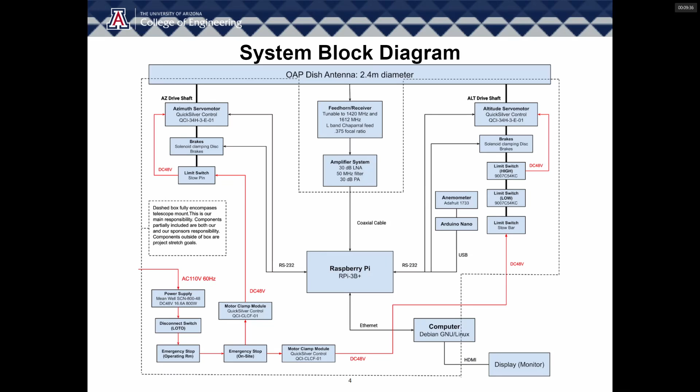Yeah. Great question. So continuing, this is our system block diagram. The dashed lines include the system that we're working on, so that's our scope. So that doesn't include the amplifier system or the receiver, but it does include the Raspberry Pi, servo motors, brakes, and limit switches, which we're all fixing, and includes the brakes and power supplies. And of course the dish antenna, which is currently 2.4 meters. We'll talk more about this in the presentation.

So these are our system requirements that Justin laid out for us and we wrote up. Our performance requirements include the resolution, pointing accuracy, and gravity sag. Our environmental requirements include the operational wind speed, survival wind speed, our ingress protection standard, the panel separation, the gaps in between each panel, lightning rods, which we're expecting to put onto our telescope, and stow pin, to ensure that there isn't a flying radio telescope on the roof of the building.

We also include our safety requirements, which include the hazards lockbox, and we have an emergency switch. Our electrical requirements include the GUI, the limit switches on the mount, and the power consumption the telescope uses, and the optical requirements. That includes the wavelength that we are intending to observe, the aperture, illumination angle, offset angle, and the mounting location. And our mechanical requirements include the weight and the brakes. And we'll go more into detail about this. I'm just going over what our system requirements include.

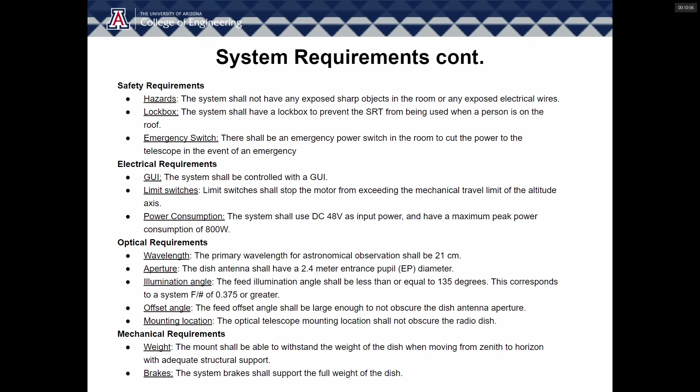Sorry, Bridget, to interrupt. You skipped over stow pin on the prior slide. Yes, so I'll explain more. It's a stow pin that basically prevents the dish from spinning around erratically. So we'll explain more what that looks like as we go into the presentation. Mason will talk about that.

Design details, Carrie will start talking about. Okay, so on the next slide, it's a repeat of the picture we showed you previously. So this is a satellite view of the potential placement of the telescope. Option 1 is preferred because its view is less obstructed than option 2. We're currently in the process of determining which option or alternative would work.

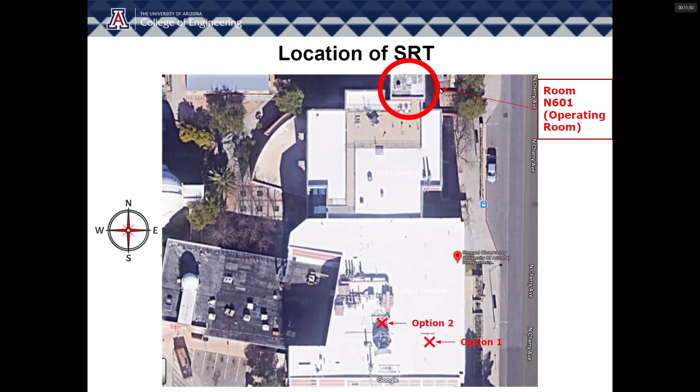On the next slide, we show the size and weight of the telescope. So it's almost 500 kilograms with the max height being just over 15 feet at stow position. And our stow position is 30 degrees past zenith. And its max breadth is a little over 12 feet, which is its hazard zone at horizon.

So this is also why we prefer option 1, because its dimensions are slightly bigger. So the pad more inclusively shows the hazard zone than the 8 by 8.5 dimension for option 2.

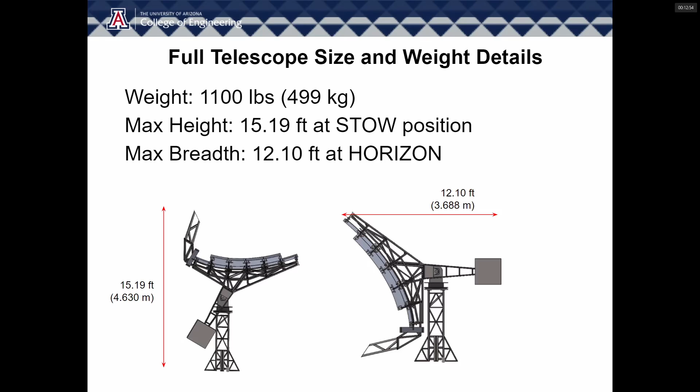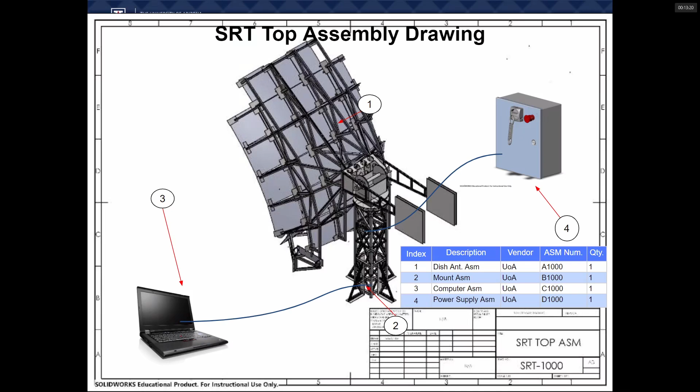All right, so here's our top assembly drawing. We've broken it up into 4 separate subassemblies. So first is our dish antenna assembly. This includes the trusses and the paneling that Justin Slive is going to be making. Number 2 is our mount subassembly. This is just, as we've stated before, the mount that's currently sitting in the storage room. Number 3 is our computer assembly, and number 4 is our power supply assembly.

All right, so here we're going to break down a little bit more about what our dish antenna assembly is. So the dish antenna assembly is primarily 4 vertical struts. If you look at the top assembly on the left-hand side, 1, 2, 3, and 4, those are the main vertical struts, and those will be connected together by horizontal angle irons. Additionally, each of these will be connected to the mounting plate.

Additionally, we will have 2 receiver arms, 5 and 6 on the bottom. And those are actually detachable, and those are just going to be where the receiver is going to be placed when it's eventually made.

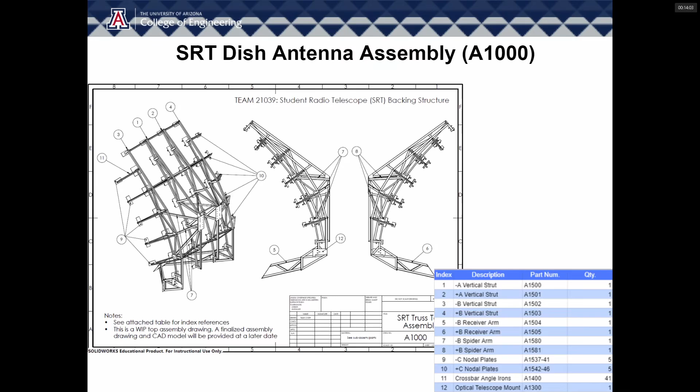So this is our SRT mount assembly. The first part is the mount central structure. The second part is the mount legs. The third part is the mount alt-az structure. The fourth is the mounting plate. The fifth is the servo motor. 6 and 7 are the gear reducers, and 8 is the anemometer. I just want to mention that the only thing we changed in this assembly was the counterweights, since this is designed for a new and heavier dish.

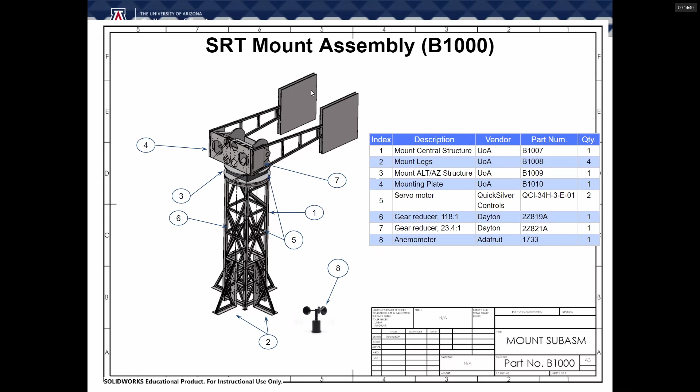So in terms of the operation of our telescope, I think the slides are a little backwards. When we're operating the telescope, the stow pins are going to be removed, but anytime the telescope is not in operation, which is going to be a majority of the time it's sitting up on the roof, these stow pins are going to be in the telescope to be an extra fail-safe should brake failure occur or unexpected apocalyptic hurricanes hit Tucson.

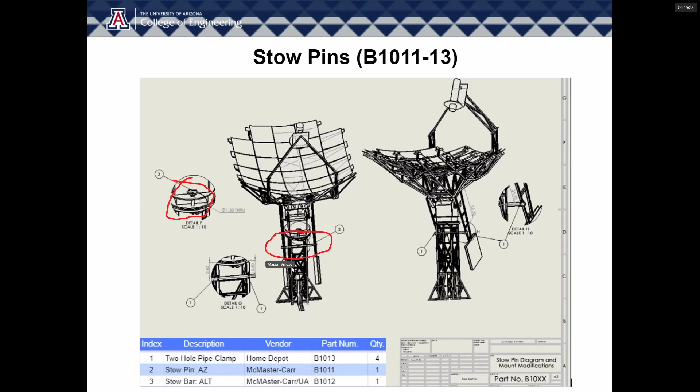So what we have is a stow pin on the az structure, and as you can see on the diagram over to the left, this stow pin goes straight through the central structure, which will stop it from rotating around. And then we also have a stow bar that connects the counterweight arms to the actual mount structure itself at stow position. And this will limit the altitude motion. By having both of these stow pins in, it'll be a good extra fail-safe.

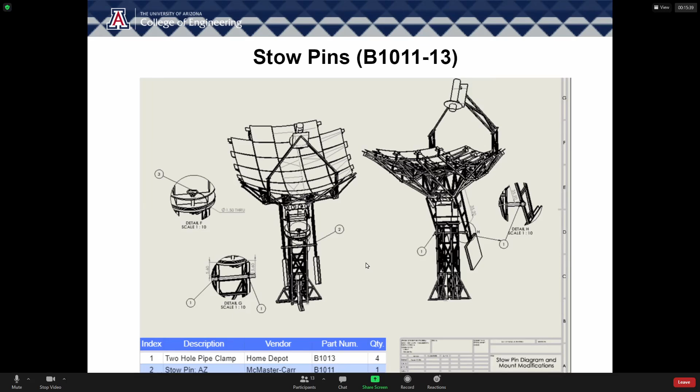So once again, going to the operation plan. Whenever someone has to approach the telescope, it will have to be completely de-energized, and we're using a lockout tagout procedure to ensure safe practices and that no one can turn on the telescope and make it spin around while someone's out there trying to remove or put in the stow pins. So once the lockout tagout key is activated, the operator can go out onto the roof and remove the stow pins and bars whenever they need to operate it.

And then when the telescope is stowed and powered off, which like I mentioned is going to be the vast majority of the time that this telescope is sitting on the roof, the stow pins are going to be on it, and the operator must schedule a specific time to be approved in order to use the telescope. As I've mentioned, the stow pins are a manual thing. We need to have approval, lockout, tagout. So there's not really going to be much chance of this telescope spinning around wildly without someone being fully aware of what's going on.

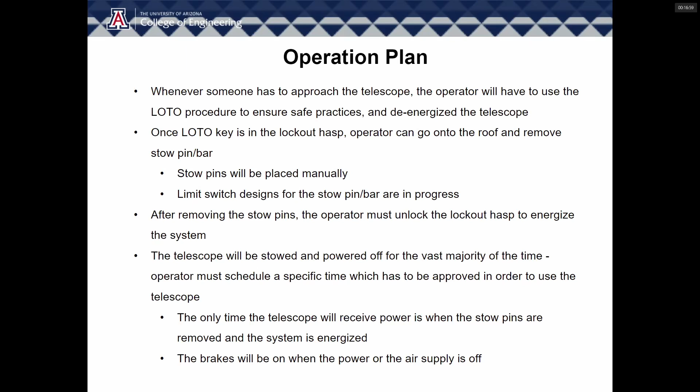I should also mention one other thing: if the power goes out, the brakes are clamped at no power. So when the telescope is powered down, the brakes are fully clamped on it in addition to the stow pins.

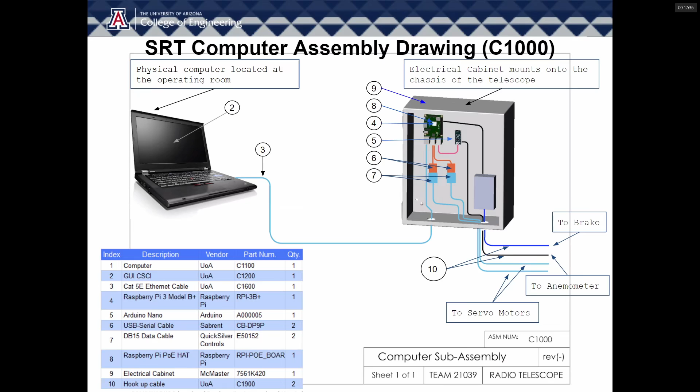Okay, so here is the drawing for our computer subassembly. The mount will be controlled remotely from room N601 using the GUI on the computer. The electrical cabinet displayed is NEMA 4 rated, and it will hold the Raspberry Pi, the Arduino Nano, and the brake controls. And then the Raspberry Pi will connect back to the computer, which will allow for precise control and monitoring of the telescope. Please note that this is the same electrical box that is shown on the next slide, but we separated the drawing so we could show you in more clarity the separate sub-assemblies. So Shangri will go into the electrical, the power supply.

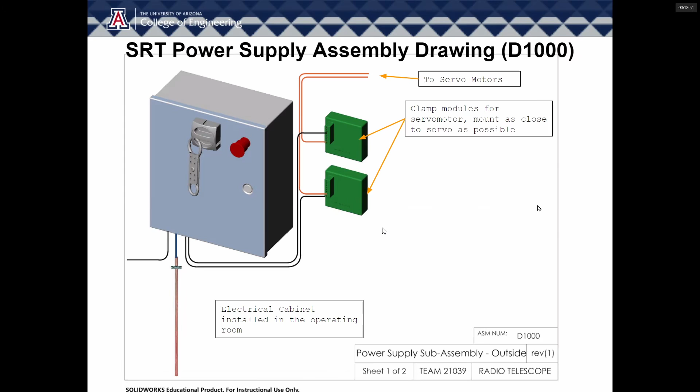Whenever you want to perform maintenance, say remove the stow pin, place the stow bar, it needs to be lockout tagout. When this lockout tagout is activated, the telescope will be de-energized completely. Nothing is going to move. We also have an e-stop on there in case somebody is around and they want to shut the telescope off. And we have the 2 green modules. They are really mounted on the telescope chassis. We just showed it for the purpose of showing. They are responsible for dissipating the back EMF when the servo motor is decelerating.

Ingrid, can I just point out one thing? The lockout tagout will be always engaged unless someone is actively using the telescope. So there will always be a padlock there. Yeah, and when the padlock is there, the telescope will be completely de-energized.

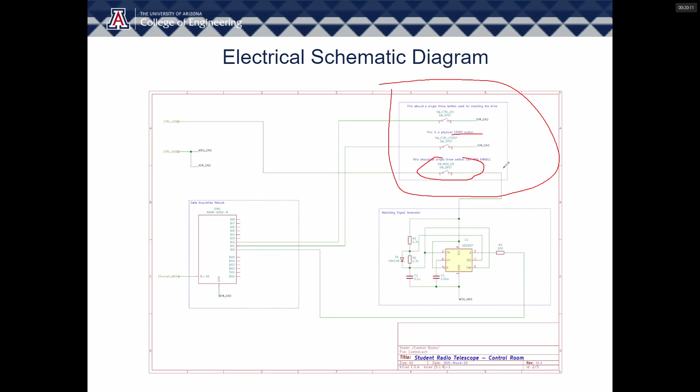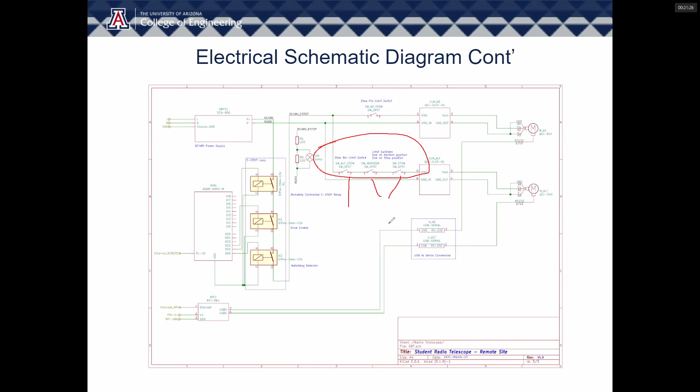And the same thing goes on for the altitude. The first one is the altitude stow bar limit switch. If the stow bar is left in, you cannot turn on the telescope. The second and the third one are limit switches. They just limit the physical travel of the antenna dish so it doesn't crash to the floor or go too far out of the mechanical travel of the telescope.

How do you limit the azimuth travel? So far, the azimuth limit is done by the software. In the software, we just say if the telescope has been turned 360 degrees, then it exceeds the limit. The main constraint is cable twisting, because we are cable feeding through the center of the telescope. That's the main constraint. But altitude, that would be a physical limit switch.

Yeah, I think you're going to find you want an azimuth limit switch as well, because you'll twist your cables off at some point if you don't, especially if you have untrained people using it. We have a solution. We don't have a physical limit switch, but we have a software limit switch. The physical switch for the azimuth, that's for the stow pin. If the stow pin is left in, then you cannot turn it on.

You also have a limit switch for travel limits on the elevation. Yes. Elevation has a physical limit switch. If it goes out, it cuts the power.

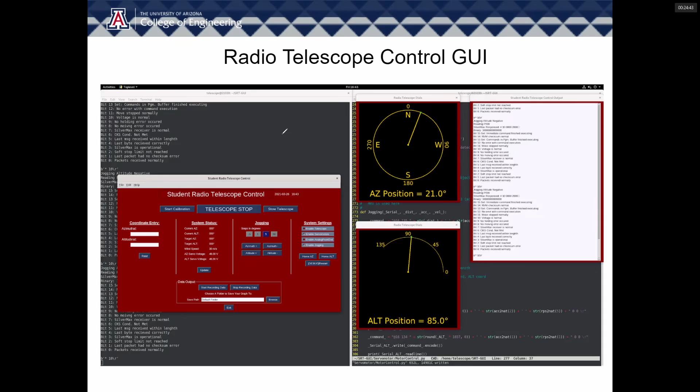And on the next slide, we have the stow. This is also a very important safety feature. This is because our telescope is an off-axis design, which means when the telescope is pointing at the zenith, that is not actually the place where the cross area is minimized. It's actually a little bit past the zenith. So when you want to shut off the telescope, you have to turn it to the stow position. In our case, that will be 30 degrees past the zenith to minimize the cross area, so the wind load is minimized.

The software is also recording the absolute position of the servo motor and its motion velocity every 2 seconds. That way, if the telescope experiences a power loss, we still know its last position, and when the power comes back on, we have a way to recover it using the stow telescope and the jogging buttons to get it dialed back in.

So here we have a short video showing just the jogging feature of the GUI. As Changri mentioned, first you must enable the servo motors and enable jogging. From there you can jog in degree increments from 0.5 degrees to 10 degrees. An operator can jog the mount in both directions at the same time. Here we can see we're moving both in the alt and the az direction.

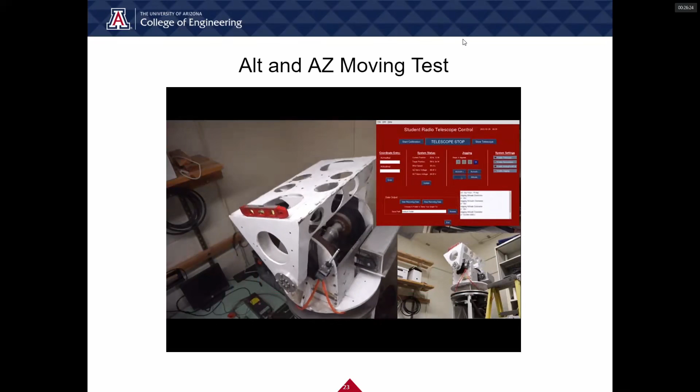Not shown in this video is the coordinate entry feature, which Changri mentioned before. That allows the user to input specific alt-az coordinates, and the axes will move to the inputted coordinates correctly.

Can I ask, that's a nice video. What speed does that represent? I believe we currently have the velocity as 2 RPM. It's easily changeable for however fast or slow we need it. We know that generally it might want to go a little bit slower, but that is something that's easily changed in the software as needed.

Yes. For testing, sometimes we will change the velocity and acceleration. And also, this video is a little bit sped up, so the actual thing is going to be slower than the one in the video. Thank you. Yeah, I think that was my question, is the video speed. The presented video is actually sped up.

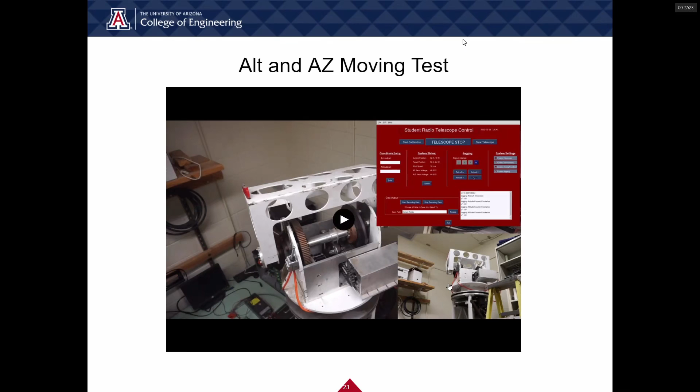Very good. Okay. And in your requirements, did you have a maximum velocity rate or acceleration rate that you guys want to move this dish at? We don't have that in our requirements, no. Okay. Slow and steady. All right, so you're not tracking LEOs. That's not the plan. Okay. I think we might want to track the sun or the moon or something like that. I think that's the best we might get. Good ephemeris objects, right?

Okay, so moving on to our safety considerations. We have an emergency stop on the electrical cabinet at the telescope. We have an emergency stop in the operating room, which is the same design as the Bio-2 radio telescope, as previously mentioned. There's a software emergency stop on the GUI. There's a disconnect switch with lockout hasp connected for lockout tagout protocol. If the disconnect switch is disconnected, the entire system is de-energized.

Our factor of safety was at least 5 for all structural requirements under survival wind speed conditions. Our assembly will be on the 5th floor roof, which follows and is set up for all safety protocols. All components can easily be moved from the base floor of Steward Observatory to the roof. Our sponsor plans on painting a hazard zone circle around the telescope to prevent people from entering.

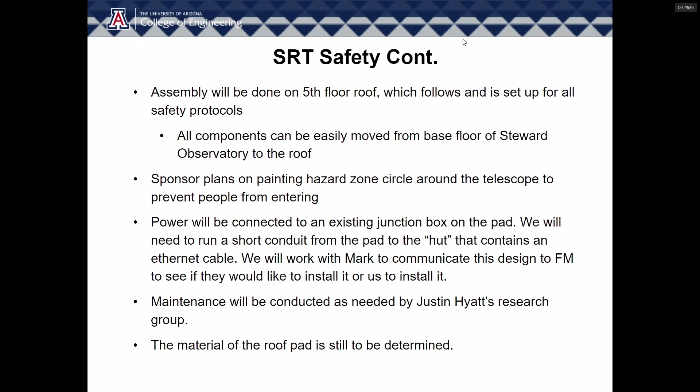For survival wind speed, we have to have... I've got a quick question, Mason. Sorry. Did you include a safety factor in the operational pointing by chance? Well, that's not really... Yeah, we have the stress plots, but we were just looking at strain because the mount's under more force under survival and it was fine there. Okay, cool. I was hoping we might get a little bit extra because we don't need a safety factor for the operational. Anyway, carry on. Like extra wind speed?

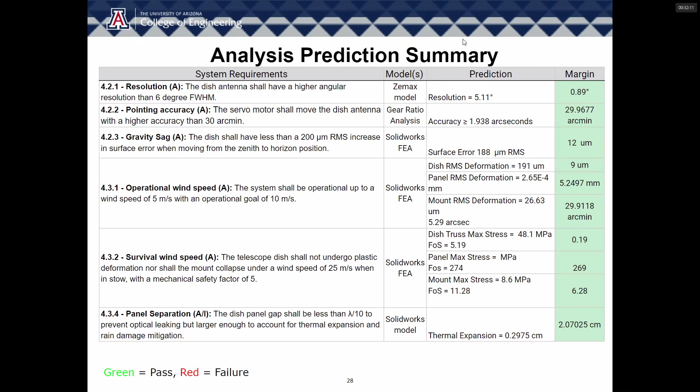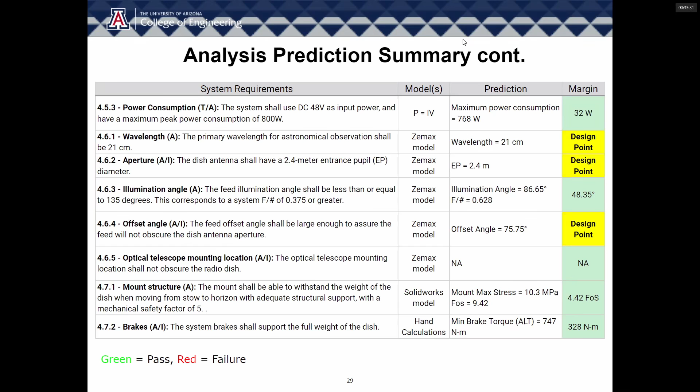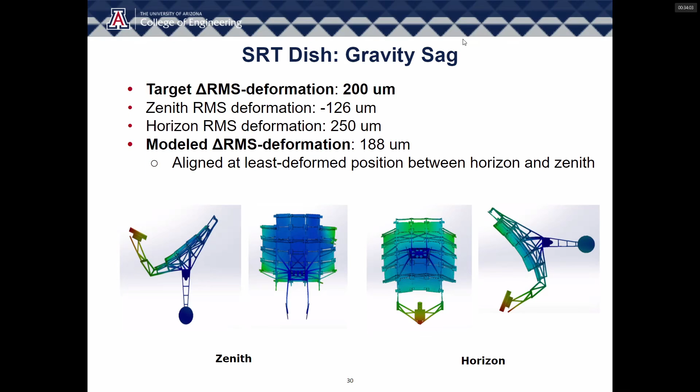All right, so one of our performance requirements is gravity sag. So for this system, we're looking for a target delta RMS deformation of 200 microns or less. Through simulation, we found that at the zenith, the RMS deformation was 126 microns, and at horizon, the RMS deformation was 250 microns. This gives us a modeled delta RMS deformation of 188 microns, and this is assuming that the dish panels are aligned to the least deformed position between horizon and zenith.

All right, and similarly for our operational wind speed, we're looking for a target RMS deformation of 200 microns or less. Here we subjected the system to FEA loads of gravity and wind speeds of 5 meters per second. We tested these wind speeds at a variety of directions to see which one would perform the worst. And the worst case scenario out of all those directions gave us a zenith RMS deformation of 129 microns and a horizon RMS deformation of 253 microns. After correcting for alignment, this gives us a zenith deformation and horizon deformation of 191 microns, which is only 3 microns worse than just under gravity sag by itself.

Jared, just a quick question on your wind speed, for your structural, maybe you're going to get to that. Did you use the zenith pointing? I assume that's where you had the worst drag, given that you've got the most deformation. Is that the position that you used for the structural, for survival? So survival, it's actually at stow. Bridget, if you want to go back one slide.

So if you look at on the left, that zenith position, 30 degrees past that clockwise, that gives us the least amount of cross area, or the smallest cross section for any wind loads. So that plane is where the wind loading is coming in for our structural simulations. So you're assuming that for survival, you're at stow. Correct. Okay.

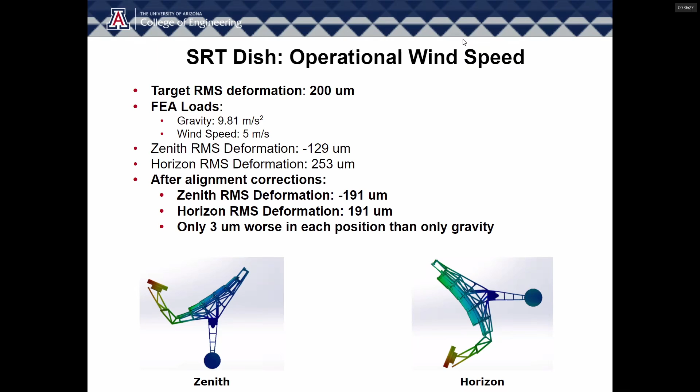Have you done any analysis to see what would happen if you didn't get it stowed before you had a storm? Because that does happen. We did not know. I can mention one thing on that. How the telescope's operated is that there's going to be weather forecasts and everything before anyone goes to use it, and it's not going to be sitting and operated for an extended period of time.

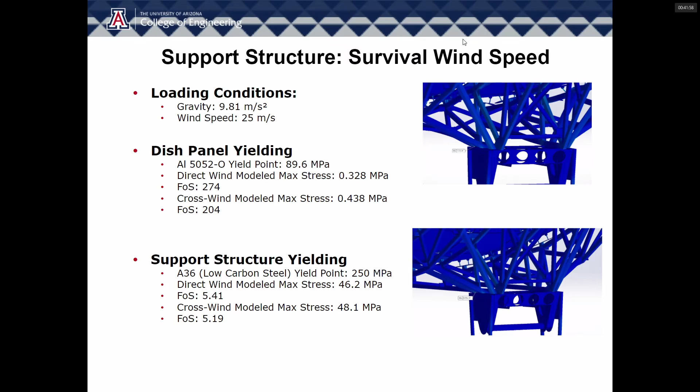Sorry to interrupt, but when I went through the original slides, I didn't see any fastener margins. Did you look at the fasteners for mounting these plates? So I used just SolidWorks bolt connectors, if that's what you mean. Yeah, shear strength, bearing, bolt bending if you have that. I don't have those currently on hand.

So let me cut to the chase. Are you material limited or fastener limited? When you define your margins, is it material yielding or is it fasteners shearing? It was material. Okay. That in general is a good place to be instead of being fastener limited. Okay. Yeah.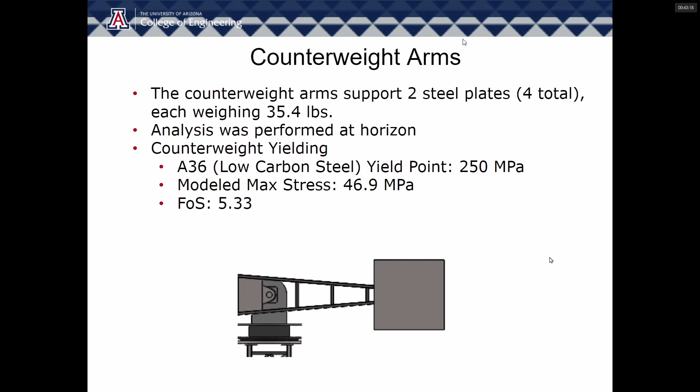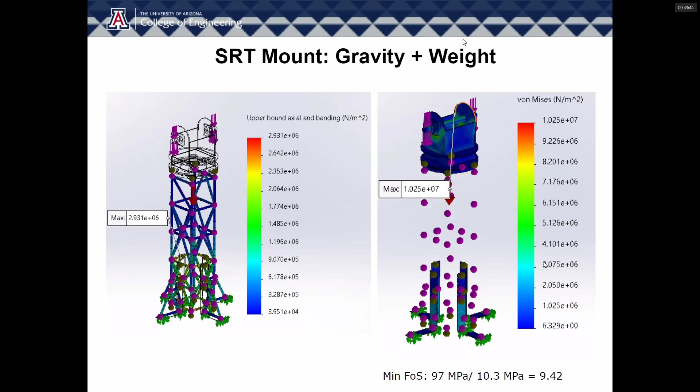Okay, so this is one of the first FEA analyses that we conducted on the mount. We wanted to see what the weight of the dish and gravity had on the mount before placing the forces of wind, and we got a minimum factor of safety of 9.42. Next slide. And this is a result for our operational wind speeds. The loads that we added on FEA was gravity, the weight of the dish, drag force, lift force, and the hinge moment. The deflection from the loads only results in an approximate 1.94 arc seconds of pointing error.

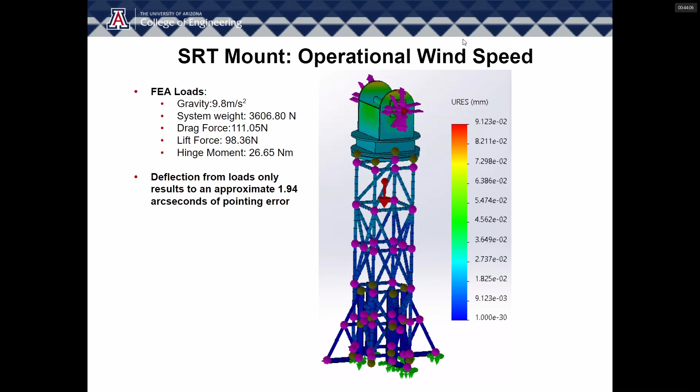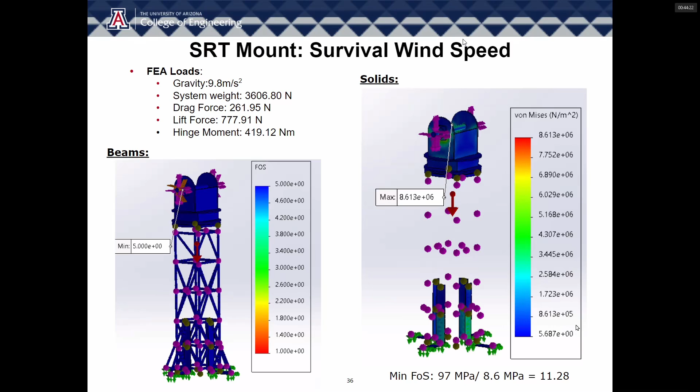These are our results for survival wind speed. Likewise, we added gravity, system weight, drag force, lift force, and hinge moment, and those are the values you see there. Our minimum factor of safety was 11.28. We conducted another test on the axle just to make sure that it wasn't shearing or failing, and these are our results.

Can I ask a question here? When you say hinge moment, well, first of all, is the large disc the brake or the gear? Is it both the brake disc and the drive gear? Is that right? Yeah. The brake disc is right there. We don't have the drive gear in on this little model. We were basically just trying to test what would fail first, the axle or the brakes. Okay. And the hinge moment then is about, I guess, Rx. Is that rotation about X? Yeah, rotation about the axle. Okay. Thank you. Very good.

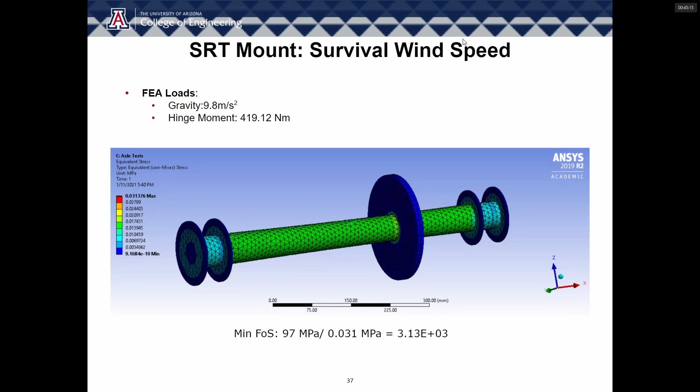Okay, and these are our calculations for the brakes. This is the equation we used. Inertia torque only applies to dynamic braking. Frictional torque was assumed 0 for a conservative approximation. Our load torque was 419.12 Newton meters at survival wind speed.

And for the braking force, we used this equation where Fn is the clamping force and mu is the coefficient of friction. For alt, our clamping force was 5,338 newtons at 250 psi. And so our braking torque was 747 newton meters. At AZ, the braking torque was 961 newton meters. And so our max load torque on the mount was 419.12 newton meters at alt, with a margin of 328 newton meters.

So hate to interrupt, but this is a new slide, I believe, from the slides that I saw before. Is this one of your newest? Yeah, we've had all of these for a while. We weren't sure what we were supposed to be presenting the last time we talked to you guys, so we just put all of these in here from previous analyses.

All right, very good. Quick question: the mu you use for your coefficient of friction, does that assume dust, dirt, oils that might be on this disc after a few months of operation, or is the mu that you use an idealized mu? Well, what is the material and the mu that you assign? Maybe it's in here. Elizabeth, I know you did that. You were the one who researched that. Yeah, I think it was an idealized value. We didn't consider the oil.

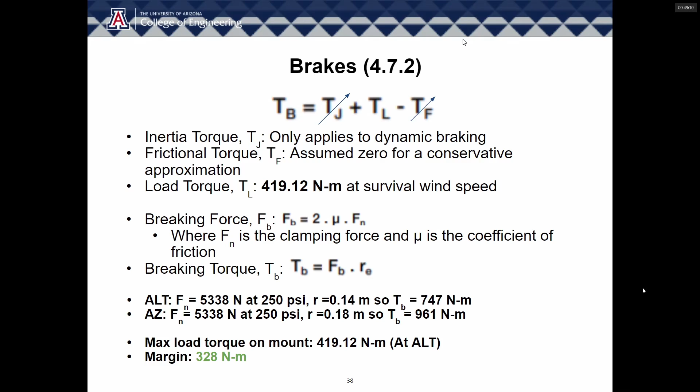All right, so here's our system requirement verification. Everything in green is already passing. As you can see, that's a significant portion. The yellows are still to be determined. So first of all is our ingress protection. All of our subassemblies haven't been completely finalized yet, so we can't test the ingress protection quite yet. And lightning strike protection, we know that we need at least one lightning rod connected to the receiver once that eventually gets placed. None of us really know too much about protection against lightning strikes, so we are open to suggestions. But we do know we need at least one on the receiver because that's the most sensitive area.

Yeah, I have some comments in that regard. You should plan for it to be struck by lightning because it will be eventually. So you need to do things like use fiber optics on your Ethernet, where you won't conduct the electricity into the building. You've got to put lightning arresters on all of the cables before they enter the control room and things like that.

Yeah, and if you can always get a lightning rod higher than your antenna, you're going to do better. So you may see if there's any lightning protection. I know they usually have a ring around the parapet. I believe I've seen lightning rods along the parapet of the building. But it's always good to have something higher than your antenna for the lightning to strike, if possible. Okay, thank you.

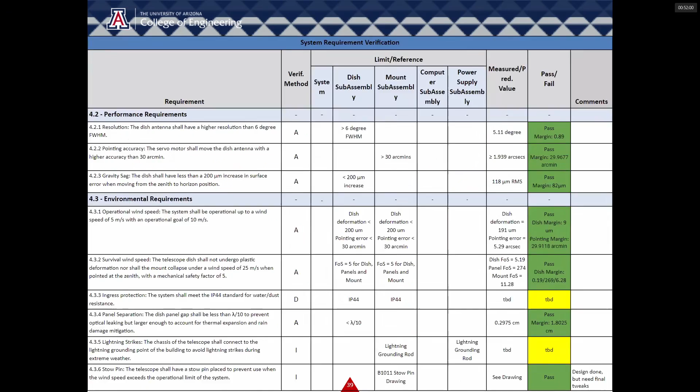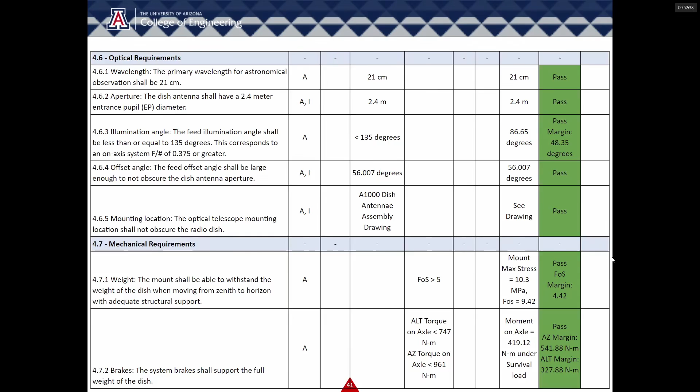So this is the end of our presentation. So to summarize what we just talked about, the radio telescope will be built with a new radio dish and truss structure and will be placed on top of a revitalized telescope mount. Computer and power supply sub-assemblies will operate the telescope as Chengri and Carrie have defined.

Currently, what we're waiting for is quotes from machine shops. We have gotten a couple so far, and once we get that, we'll be sending those quotes to Justin, and we'll be moving forward with that afterwards. And then we'll have the revitalized mounts and the software all completed by the end of semester or May 2021. And we expect this radio telescope to be safe to be operated by students, faculty, and the general public.

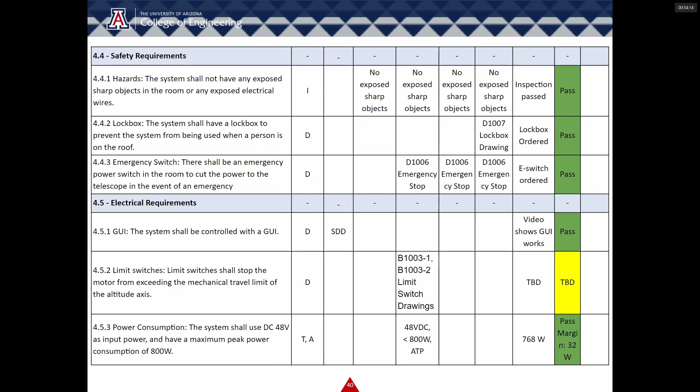And then we said we have questions. We have a couple questions. Chengri, do you have an answer to the power consumption question? Yep. Let's see. One, the current. I believe we found it on the data sheet. 34H. No, not this one. Okay. Do you guys have any other questions? Is Chengri still looking for that? Yeah, I found it. I don't know how to share this information. Maybe I can share screen. Alright.

So I had a couple of other questions on the drive system. Basically, the motors are way more powerful than the gearbox can stand. So you have to have a way to keep from breaking the gearboxes if you have a problem with your commanding. If somebody raises the acceleration rates above what the gearbox can stand, you could break your gearboxes. So that would be changed in the code only. Only authorized people will have access to the actual code. The operator will not be able to change the acceleration and the velocity. That needs to be changed in the source code.